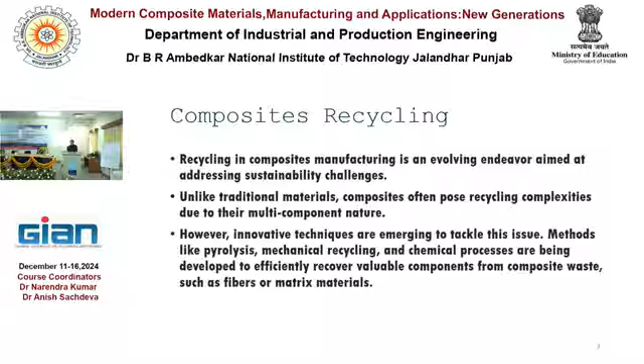The mechanical method is very direct and close at hand. This is one example of the mechanical recycling method: needle board, where they just punch the discarded, wasted product. Then fiber web or many debris can be obtained.

So after that, this is a CFRP after the needle punching. This is an SEM image of viscose fabric-based needle punched nonwoven fabric. This will be used after some kind of washing process, something like that.

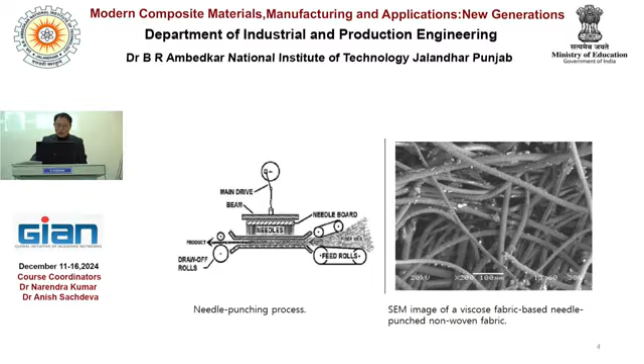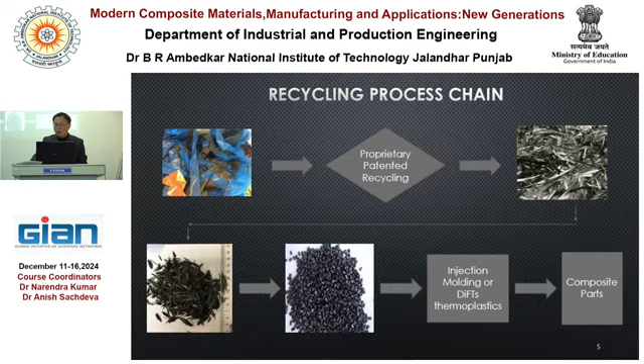So, the recycling process chain: this is waste composite, then a proprietary patented recycling method is adopted, and it's prepared and made into many small pieces, then next smaller pieces, and injection molded or used in another thermoplastic way, so it can be recycled into a recycled product. This is a very general process, we can say.

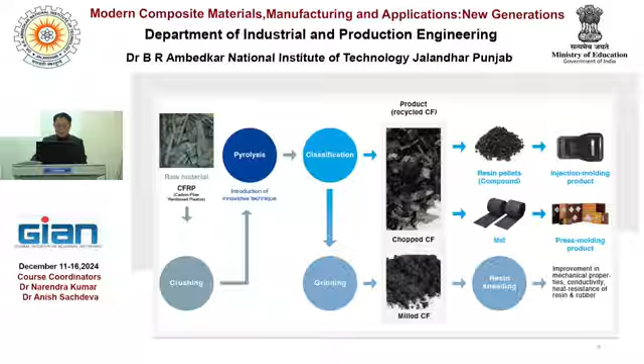The rise of composite material in various industries is due to lightweight application, performance advantages, and versatility. Due to those characteristics, we will have more and more composite products, and after that product is finished for its purpose, it will be discarded. Then it causes environmental concern, and we need a sustainable solution for that.

Landfill is one way we usually do this, but it's not a good choice for recycling, because it's not recycling—it's just buried underground. Because of the nature of polymers and advanced fibers, natural decay takes a long time, so we cannot expect natural degradation within short periods. So the landfill issue is raised commonly, along with resource depletion.

Virgin material extraction for composites affects the ecosystem and resources. And the carbon footprint: production and disposal of composites both increase the carbon footprint crisis. We need to solve these kinds of issues.

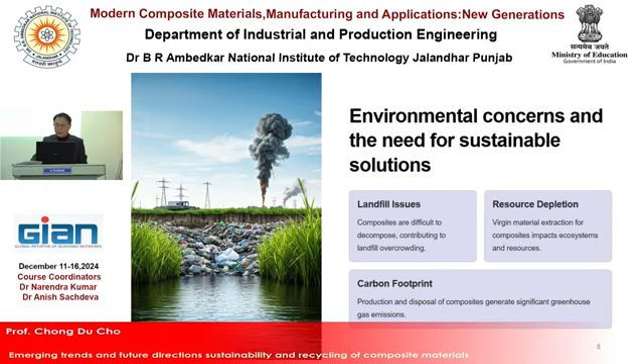Current recycling methods for composite materials are mechanical recycling, chemical recycling, and pyrolysis. Mechanical recycling, like the needle punch method, involves grinding, shredding, and separation techniques that mechanically separate fiber and matrix materials. It's very easily understood, but the result is not so cleanly washed for recycling, meaning using it as-is would give relatively low quality raw materials.

Usually recycled fiber has less than 80% of its original properties—maximum 80% or slightly over—of its original strength or stiffness, something like that. So maybe we should expect 60% or at most 70% in general. So mechanical recycling has some drawbacks, and we can also use chemical recycling.

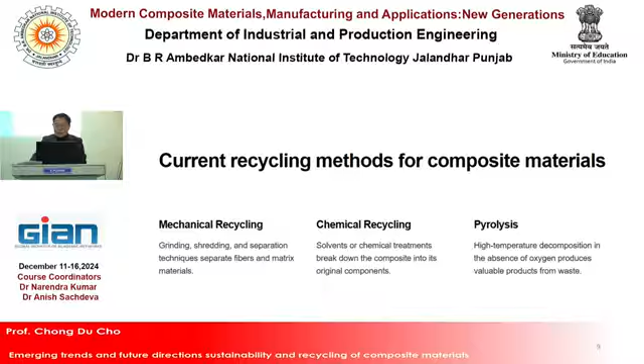Pyrolysis means high temperature decomposition in the absence of oxygen, which produces valuable products from waste. This requires tremendously much heat energy, meaning it would be expensive, and the process of pyrolysis may produce some kind of unwanted pollution. So each of these methods has its own strength and drawback, of course.

So we should choose or combine materials together to get our product satisfied for our purpose. The limitations and challenges in composite recycling are technical barriers, economic viability, and mixed materials. Those three keywords can be considered.

The technology barrier means efficient and cost-effective recycling is needed. Otherwise, the final recycled material would be too expensive. If it is more expensive than its virgin material, who will use the recycled one? So that recycled material cost should be reasonable, and efficient, cost-effective recycling technique is mostly needed.

Economic viability means recycling cost often outweighs the value of recovered materials. That's linked to the previous viewpoint. So maybe some kind of benefit may be needed to promote recycling, and that is a policy level support needed to overcome these things.

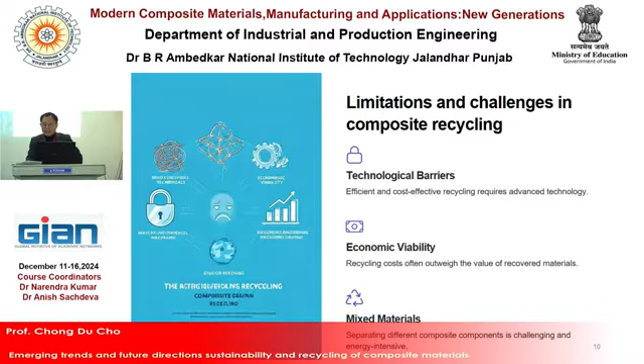So innovative recycling techniques are continuously coming to us. Advanced sorting techniques, bio-based resin, closed loop systems - those kinds of things are being considered to get more advanced and innovative recycling techniques into our society.

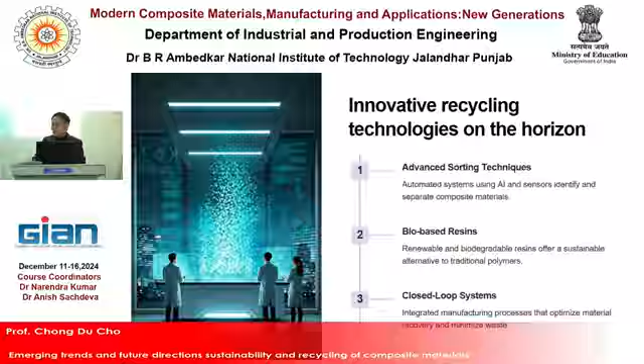And the circularity and closed loop economy for composite waste: design for recycling is needed, repurposing and upcycling should be considered, and sustainable manufacturing needs to be reached. Among those, design or sustainability is very easily understood, but here's upcycling.

Mostly we say something should be reused, meaning the performance would be expected to be lower than before - that is downcycling. But upcycling means not just recycling; after that process, the material should be reborn with higher value performance. That is upcycling, a function-added cycling.

So it can be possible together with very modern design technique and some kind of idea that is needed for it. Upcycling is the best one.

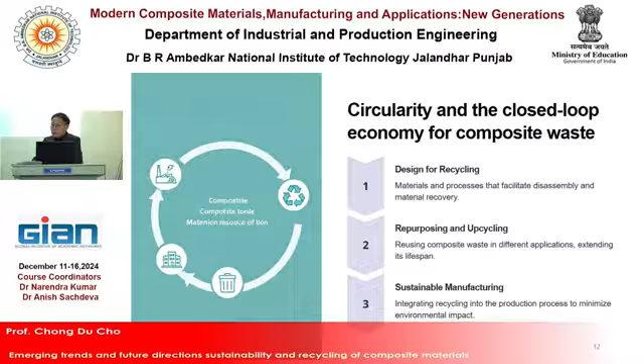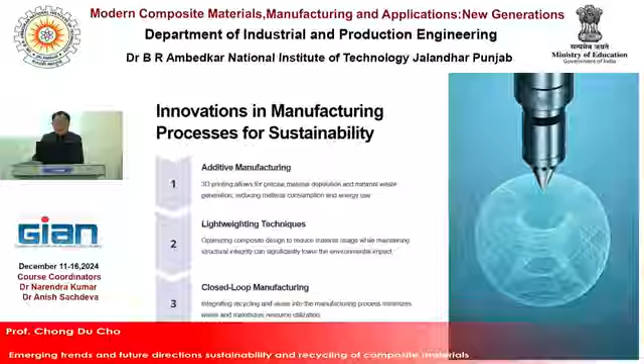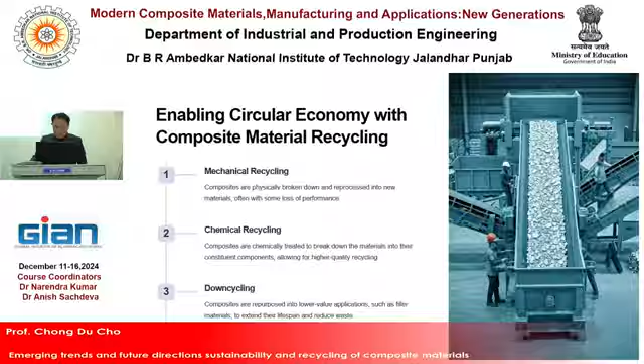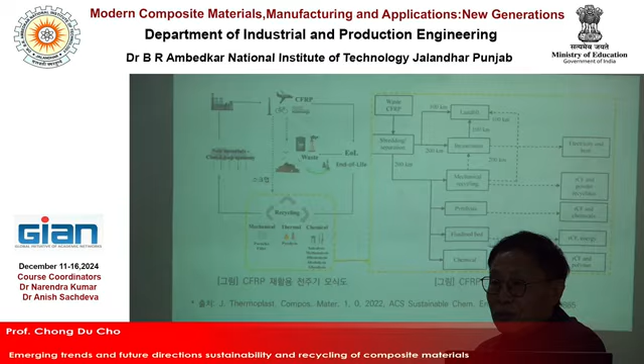And carbon is hardly degraded, right? Decayed. Carbon is very strong, and carbon fiber is very expensive. So even though after recycling its fiber gets degraded down to 60% of its original property, it is still pretty good for other purposes. Right? And CFRP is one of the most commonly used materials for manufacturing products these days. So carbon fiber reinforced polymer waste is very much emphasized by policy. So there are many efforts to create innovative recycling methods for CFRP, because most manufacturers must follow the regulation.

So this is CFRP, and EOL is the end of life, and then waste. It can be landfilled, or as scrap it is recycled. Okay? And a new material closed loop economy is very needed, right? Rather than just this kind of very worst case of waste. Right? So to make this kind of loop possible, recycling methods, mechanical, thermal, or chemical, are very important. Right? So come back to here. Okay.

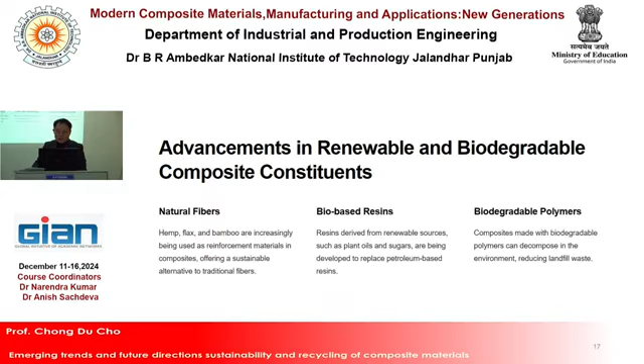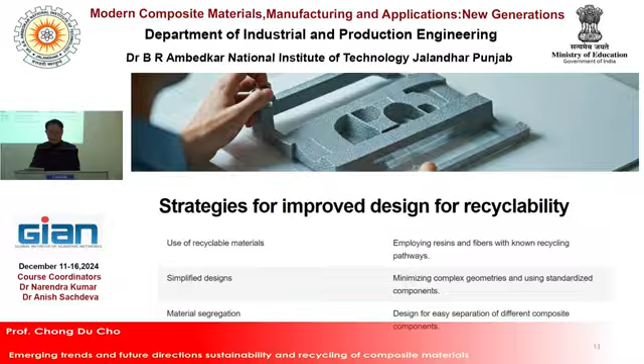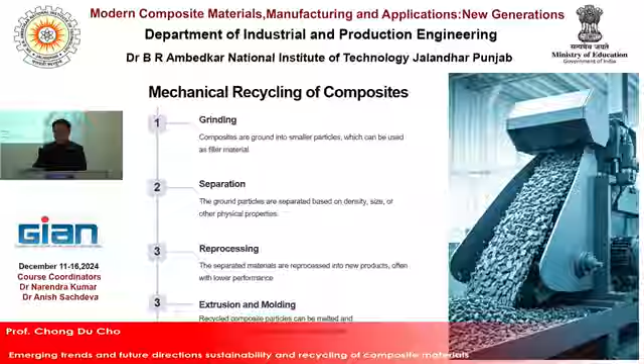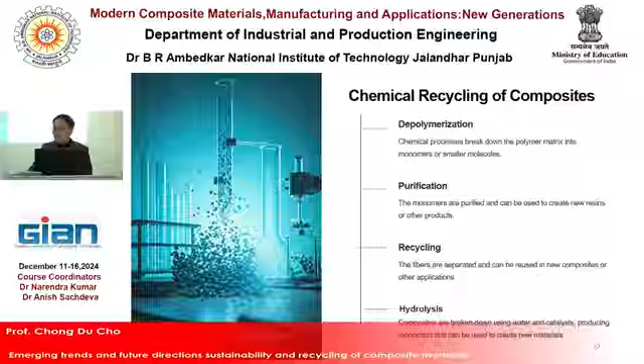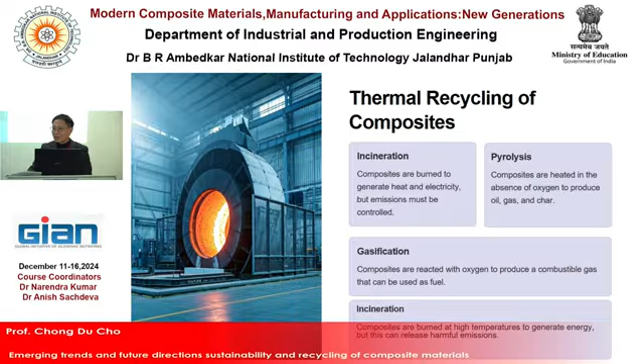So we can imagine how this can be recycled. Then mechanical separation is most easily imagined. And chemical is maybe a little bit different for non-expert people, okay, because they need a chemical process.

And pyrolysis is maybe a little more understandable than the chemical process. So any kind of combination or newly proposed method will be very valuable in this new business sector. And for the circular economy, design for recycling of composites is needed. That means at the stage of composite design, it must be considered how it will be a fully closed-loop system. That kind of effort is required.

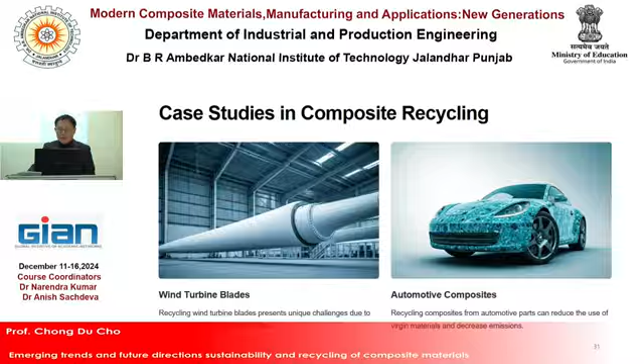Right? But the composite material case is a little bit different than previous polymer-based monolithics or aluminum or those kinds of things. After recycling, those are almost no different from the original in terms of material. But composite material, in the case of fiber and matrix, cannot be perfectly recovered to its original raw material. So I think it is unavoidable that recycled composite material will not have equivalent properties.

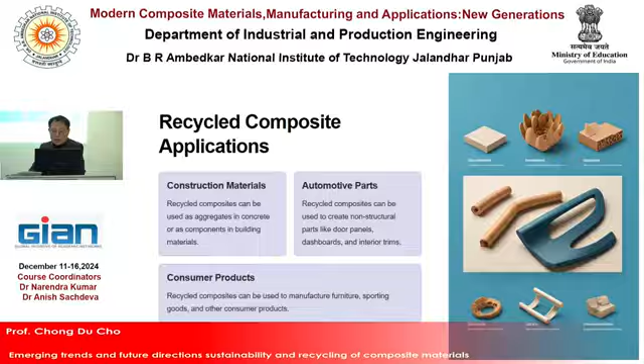So we should find more creatively how those can be reused. Maybe using some upgraded design concept may promote its usability. Then we can have a kind of upcycling result. And the environmental and economic benefit is very clear, right? Reduced landfill waste is expected, and economic growth will be obtained, because composite recycling creates a new industry and jobs, and it can stimulate economic growth and resource recovery.

So composite recycling is a very new business, starting just a few years back, because mass production of composite material components began maybe around 2010. Then after 10 years of use, a lot of waste appears. That means just 4 years back, the recycling issue of composite material was raised. So this year or last year was the beginning point of the recycling business for composite materials. Okay? That means the methods and business benefits are not well established. So that is another chance to challenge it.

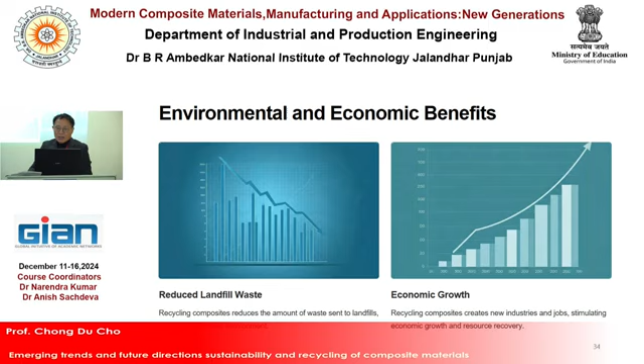And the conclusion and future outlook: recycling composite material is essential for a sustainable future, and ongoing research and development are crucial for improving recycling technology, expanding applications, and creating a circular economy for composites. The future of sustainable composites is bright with continued advances in material science, manufacturing, and recycling technology. Sustainable composite material will continue to be an area of intense research and development, driving innovation in a range of industries. So this is about the recycling issue with composite material.

So conceptually, okay? It's not all of our lectures. Our purpose is just to provide a conceptual, large-scale viewpoint only, not the detailed techniques to calculate, analyze, design, or manufacture real parts; those kinds of things are not included here. The purpose of my lecture series was to provide you motivation toward composite material mechanics in various ways. So if you notice that composite material and its related technology will be crucial to our future, and you have motivation to participate in those communities, then I think my lecture would have some result.